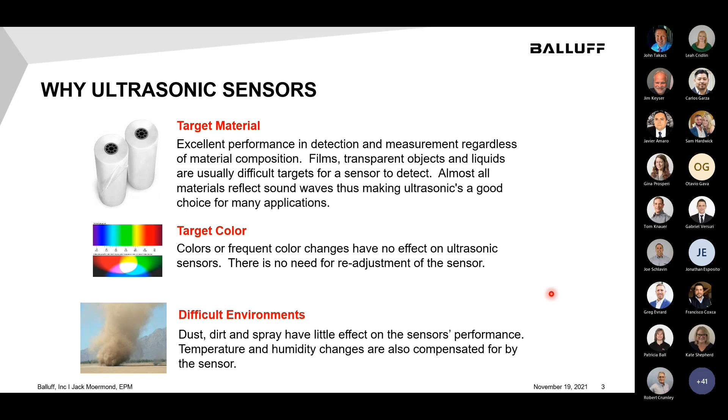I actually pretty well touched this—why not use photoelectric sensors? One of the nice things with ultrasonic is you can set them up in basically proximity mode or like a diffuse sensor, and you can get some long ranges out of these guys. I mean, you can get ranges up to 20 feet that you can't do with a diffuse type photoelectric sensor.

Surface color, reflectivity—I mean, clear glass to an ultrasonic sensor is the same as a shiny metal plate. It doesn't care. So we can get good sensing repeatability out of these guys. Then the analog response is good, and so is the resolution on these ultrasonic sensors. So in some cases, it's actually a great alternative to photoelectrics.

I think I was actually talking to Mr. Takacs one day. He had an application where he was trying to detect a tire and do some measurement, and he was looking at the sidewall, I believe, and I suggested ultrasonics because, again, it's a good surface to bounce the sound off of.

So there's a ton of applications and industries you can use these sensors in: material handling, automotive, packaging, pharmaceutical, tires, paper and printing, and just a number of other applications these sensors can be used on.

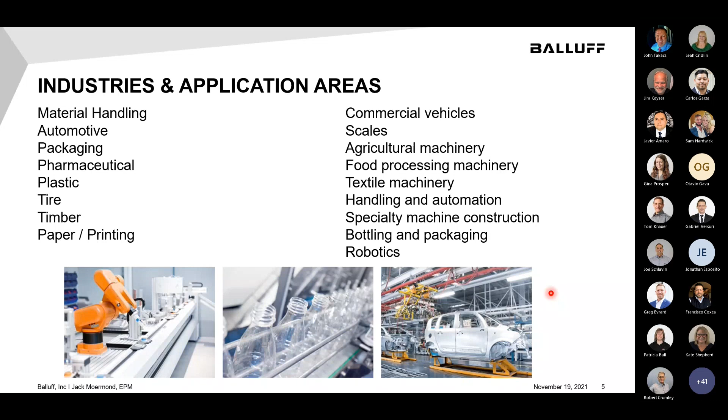Moving along the same line, you can use these for web monitoring. Basically, you can use them for loop control. You can use them to see if a web's been torn. You can do height and width measurements.

Typically, these are going to be like the 30 millimeter and 18 millimeter sensors, so you can set these up as a three-dimensional measurement—look down and also look at the side, from each side. So it's a good alternative to photoelectric there.

You can do presence verification, so whether or not there's actually an object there, if a pallet's full or empty, if containers have product inside of them. You can use multiple sensors and look at a big area if you want to.

Robot positioning with ours, with the versions that are in the R06 type housing and also the M12 housing. You can verify positioning with robots, put these on the end effectors, and they're fairly lightweight.

Another application is wire or thread breakage. So the key thing here is obviously you have a small object, so you're going to want to use a relatively small style sensor, but you also want to make sure that the object always stays within the cone, the sound cone coming out of the sensor.

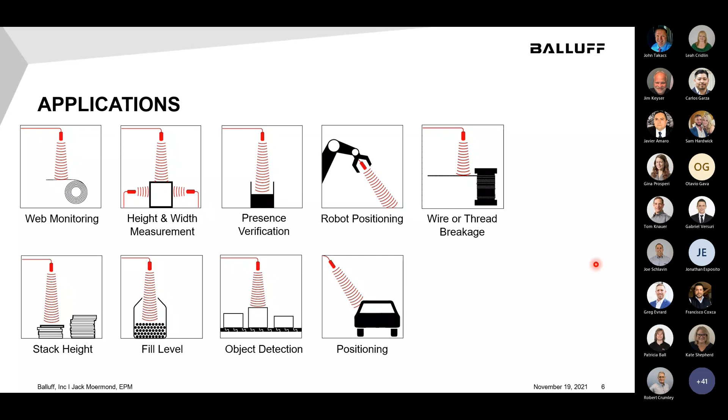Here's some pictures from some different applications. So this is basically clear plastic off of a payoff reel. So they're actually looking down to see what the diameter is. Works a lot better with ultrasonics than it would with photoelectrics because of the clear surface. Concrete block stacking to see if the stack is at the right height. This one is for collision avoidance. It's one option to do it that way.

Again, presence loop control. This would be great on paper. Making roofing shingles or roofing paper and stuff like that. So you can do good loop control. Again, even steel. This is an application from life science to verify that vials are filled at the proper height.

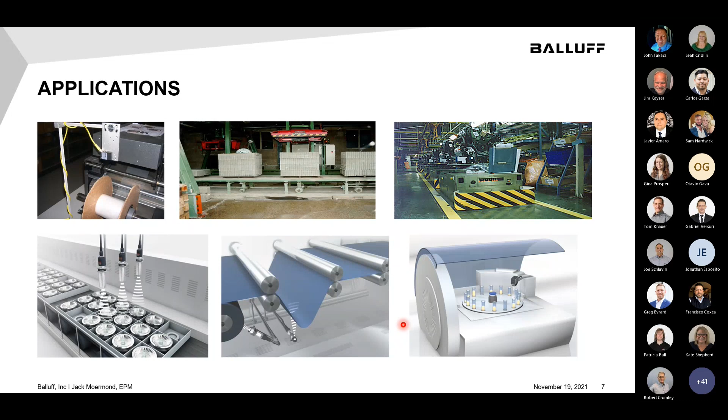And then this application here is to ensure that the packages have been sealed. So if you have a package that's not sealed like these are, it's partially open, it's a great application for that. Again, more loop control, robotics, silo fill.

There you go, John. Got one for tires for you. So we can do tires. I think this is a type of a payoff reel for like rubber or something like that. Both of those are tire, yep. Are they? Cool. Both of those are tire.

I'm trying to take care of you. You're a good man, Jay. I know. I try. Don't let Leah tell you differently. I don't pay attention to her.

Anyway, and then this one here, this is a life science application. So these are what they call microplates. So they put various liquids in there for testing and so forth. We actually have a demo set up this way that we're going to take to some life science shows. So we put this focusing attachment on there. We can look down into these microplates. And typically these cavities are maybe 1 centimeter in diameter or maybe a centimeter deep. So we can detect those levels with the ultrasonic.

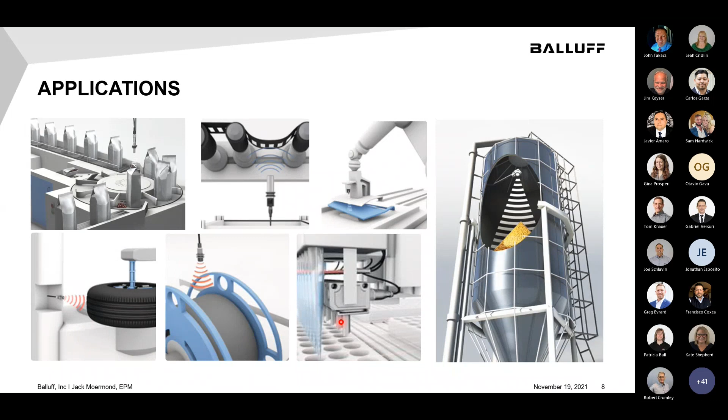So what are some good targets? Water, paint, varnish, wood, plastic, steel, concrete, glass, hard foam. So hard foam being stuff like maybe styrofoam or the pink insulating foam that they sell. Then some poor targets are cotton and wool, or a lot of fabrics, soft carpet, foam and soap.

I actually have seen where the foam in beer is what they call hard foam because of the carbon dioxide. So actually, according to what I read, you can detect beer foam with an ultrasonic. Any powders with high air content, again, soft foam, and flour is actually one of the worst things. They say it absorbs sound very, very well.

Nice chat there, Bon and Will.

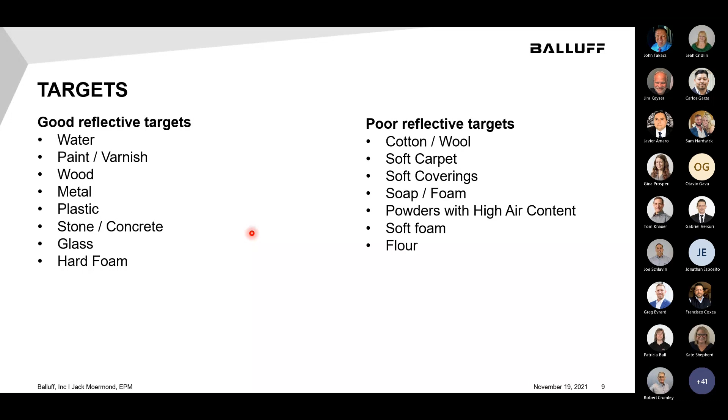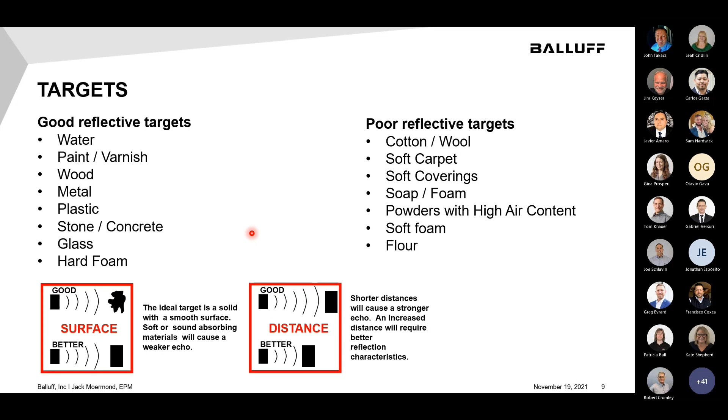Anyways, some more things on the targets. The ideal target should be solid with a smooth surface. If you don't have that and you have a rough target, you can still do it, but it's obviously going to have a weaker echo. The shorter distances could cause a stronger echo, or an increased distance will require better reflections. However, if you're doing something like thread or wire, you're going to need that shorter distance. And then obviously a larger object gives you more surface to reflect the sound back to the receiver. So if you have a smaller target, use a smaller sensor, get closer to it.

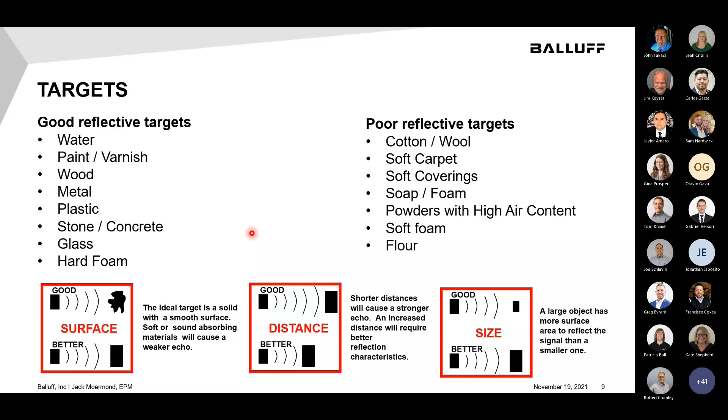So how do these guys work? These are basically time of flight sensors. So there's a transducer inside that sends out a burst of about 200 kilohertz sound waves. So some people can hear them. Personally, I cannot. So it shoots out this sound wave and it's in the shape of a cone, and that's very critical. I'll talk about that in a second.

Anyway, the sound wave goes out, hits the target, it's reflected back. The sensor calculates the time from when it's sent out of the sensor till it receives the signal back. Again, just like time of flight with a photoelectric sensor. Okay.

With an ultrasonic sensor, it's a three-dimensional detection zone. Okay, so that's kind of key. I was talking with some folks yesterday about an application, and we kicked around using an ultrasonic, but again, this sound wave goes out in the shape of a cone, and it's three-dimensional. So if there's a flat surface here, there's a possibility you might start getting sound waves bouncing around or echoes. So you have to keep in mind what that cone shape is and the size of it.

How they determine what the detection range is, they take standard targets and they move them from side to side. So in this case, for the red zone, the typical target is either a 10 millimeter or 27 millimeter rod that they move back and forth across there to determine the red zone. To determine what the blue zone is, or the maximum range, they use a 500 by 500 millimeter plate and they move it back and forth to determine what it is. We cannot detect anything outside of the blue zone, so you're going to want to make sure you keep it within that area.

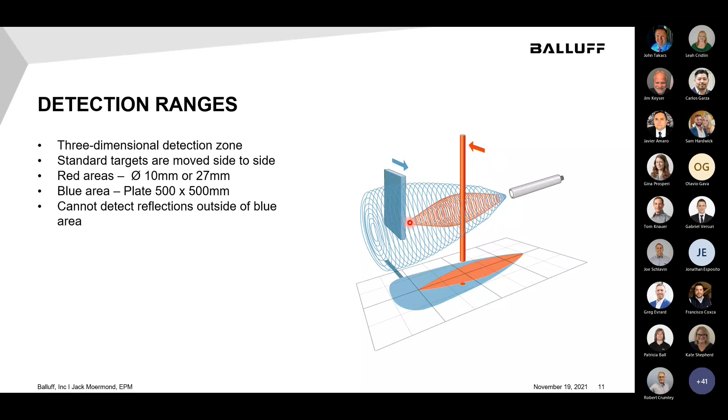Some definitions that are really key. So the first one is a blind zone, or some folks call it a dead zone. If there's any objects that get into that blind zone, you're not going to detect them. Or if you do detect them, it's going to be very unreliable. So make sure you keep that in account. And it's just like some photoelectrics have a blind zone in those as well.

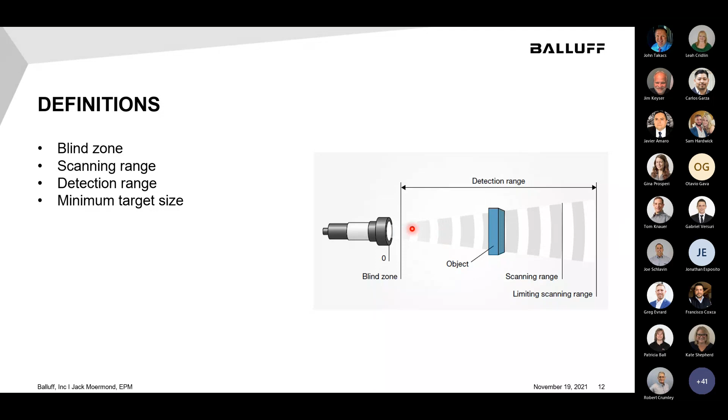Your operating zone, or your scanning area here, that's the assured area of detection. So anything within the minimum and maximum range, you're going to be able to detect those best. Your detection range is where you're going to get a fairly decent measurement or detection. But once you start getting out into this area here, you might start getting some unreliable results. So you want to make sure that you're within basically the assured area. And again, the target size, you have to keep that in mind. So if you have a small target, you want to use typically a smaller sensor, just like you would a photoelectric.

You can get some different operating modes out of these sensors. So the first one is background suppression, and it's just like a photoelectric background suppression. So with this, you have control over the hysteresis. You can ignore the background. So you set up your switching point just like that and totally ignore the background.

The level demo that exists out there that has the RS6 ultrasonic sensor in there, the range on that ultrasonic is much farther than what the tank is. So basically it's kind of working in background suppression mode. So I taught it what the low level was, taught it what the high level was. And so it's basically the BGS mode.

Thurston just brings up a good point. Sensing distance is based on the target size, so the applications must be tested very thoroughly too. Just like capacitive sensors and some other stuff, we really need to make sure these things are tested in the worst condition.

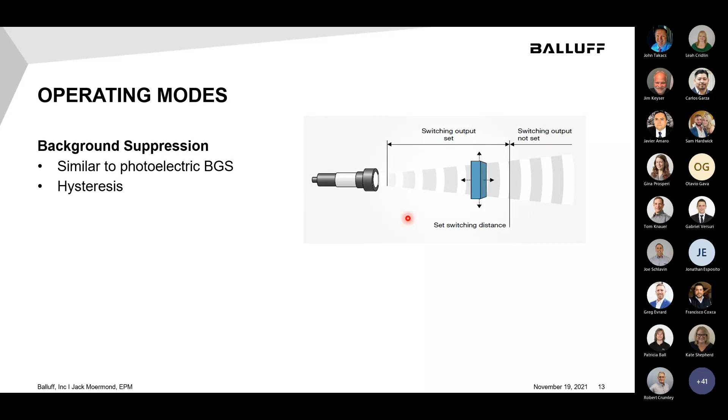Diffuse, like I've said, this is similar to a diffuse photoelectric sensor. So any object that's put out there is going to reflect the sound back. Again, the harder the surface and the better that the surface can reflect sound, the better everything will be. But again, it's just going to be just like a diffuse sensor. Anything that gets within that area, we're going to be able to detect it. And with these ultrasonics that we have, we can get a discrete output, or we can get an analog output, or both.

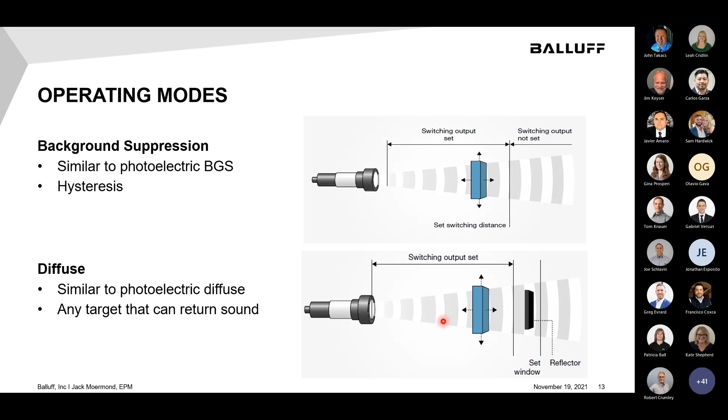There's also a window mode. So as long as the object stays within those two limits or within that window, it'll be able to detect that. You'll notice that a lot of photoelectric sensors now that are coming out, like the R254, you can set things up in a window. So it's something that's pretty common, even in pressure sensors.

Then last but not least, we have analog. So the analogs can be 0 to 10 volts or 4 to 20 milliamp. You can scale these guys so you get a linear output. And you can also select whether it's rising or falling. So as the object moves towards the sensor, you can either have it falling because of the short range, or you can reverse that and have it rising. So as it gets closer, your analog output goes up. And resolutions on these sensors can be anywhere from about 25 microns or 36 microns and better.

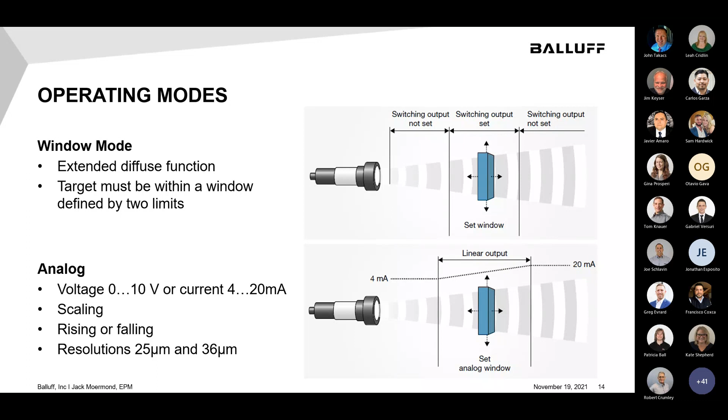So let's talk some application considerations. Again, smooth surfaces are the best. If you have a smooth surface like glass or metal or whatever, the sensor should be perpendicular to it, or 90 degrees, plus or minus 3 degrees to the surface.

If you have a rough object, say, I know one time there was a customer that wanted to do basically a dumpster, and they were throwing stuff in there to see what the height was. If it's a rough object, you can have a greater angle on the mounting because you have so many rough surfaces coming back at you.

Gina just asked a question. What's the most common application for window mode? Great question. Let me think about that one, Gina, and I'll get back to you.

Right now, my mind is blank. Actually, my mind's blank a lot. But anyway, it's blank right now for answering that question.

If you're doing temperature, say for hot metal, the one thing that you really can't do is put these in a lot of turbulence. So above a tank of like molten aluminum or whatever, it's going to be very turbulent. So basically what you're going to want to do is try to shoot this with multiple sensors, maybe go at different angles coming down in there. It may work, it may not. You really got to test it. But the one thing you definitely cannot do is mount it straight above shooting down.

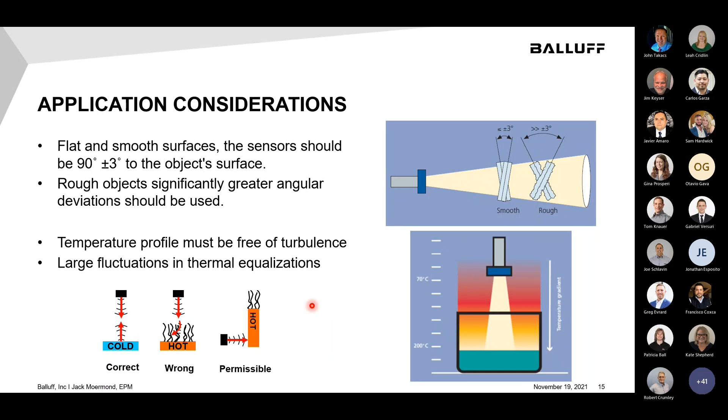Some more considerations. Vacuums. Sound does not propagate in a vacuum. So you can make some measurements in a slightly negative pressure, but as the pressure becomes more negative, your signal is going to be reduced. If you're going into positive pressure, there are some sensors that will operate up to about 85, 87 psi. I think that's like 6 bar. So you can do that.

Normal precipitation, like rain, snow, or fog, usually does not affect these sensors. The maximum range can be reduced, so you want to keep that in mind. Also, you should not let water droplets, snow, ice or anything like that accumulate on the surface. If you do that, you're going to start getting some false measurements.

Dusty environments typically do not affect these sensors. Again, it's something that's going to have to be tested. But paint, anything that's hanging in the air should not really affect it unless it builds up on a transducer surface, in which case you will start having issues.

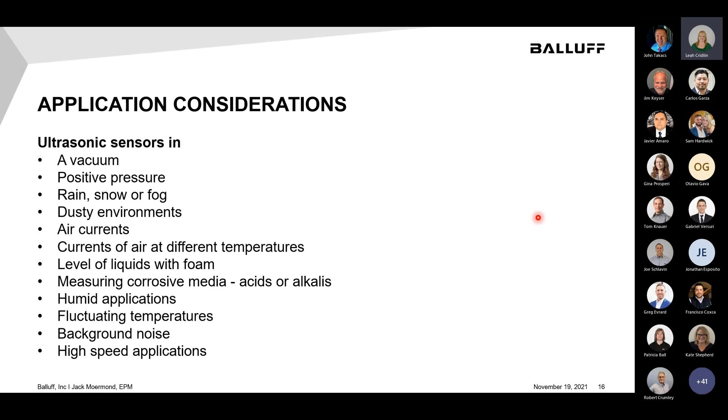These products, our ultrasonic sensors, are actually microsonic or brand-labeled microsonic sensors. As we go through here, once I get into competition, you're going to see that.

Our portfolio includes M30 housings, shown here, with 5 different scanning ranges from 30 millimeters up to 8 meters. These have a display on the front showing you the distance, and push buttons so you can select parameters.

You can get 1 or 2 switching outputs, either PNP or NPN, and analog outputs, either 4 to 20 or 0 to 10. Again, the display gives you the actual measurement coming out.

Most of our ultrasonic sensors can be synchronized. So if you have several sensors, say looking at a big pallet, you can synchronize up to 10 ultrasonic sensors so they don't cause any crosstalk. That's pretty much true on every one we have, and you can teach this guy with 2 push buttons.

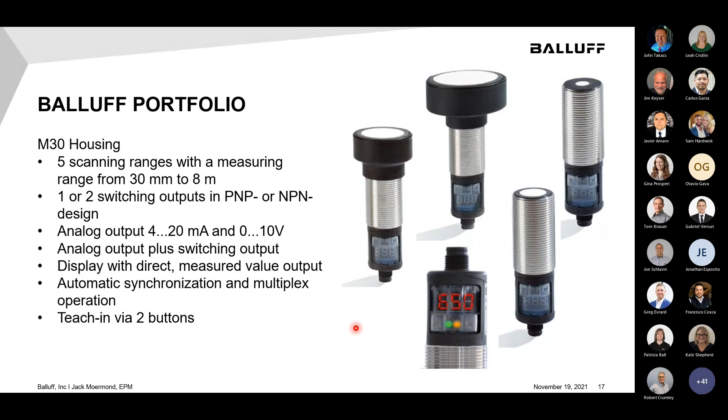There is 1 M12 ultrasonic sensor. It has a measuring range from 25 to 200 millimeters, 1 discrete output, either PNP or NPN, and the same thing with this, you can teach it using pin 2.

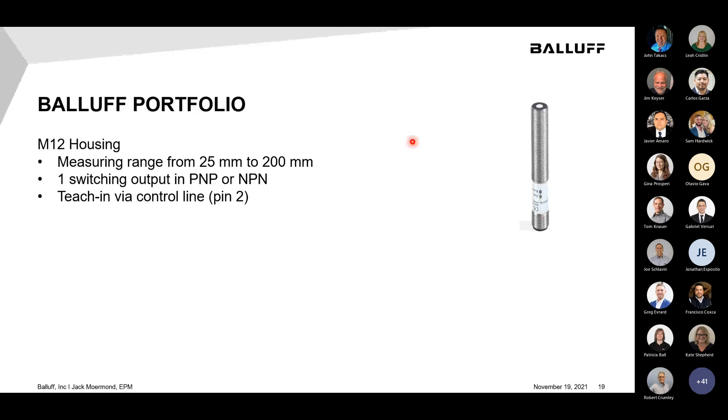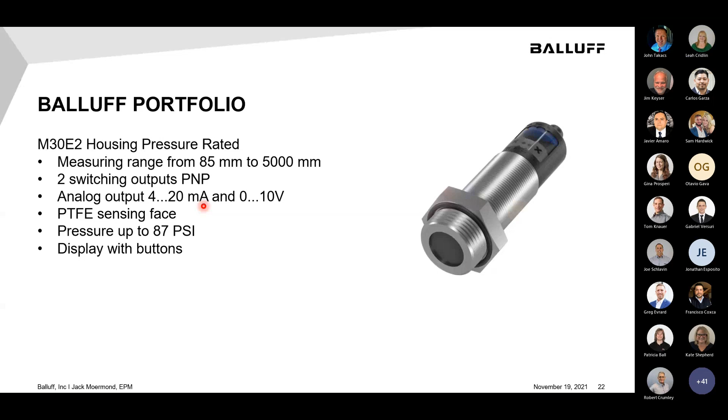Some accessories we sell: you can deflect the sound, so you can put this in and shoot sound at like a 90 degree angle. You can put focusing attachments on here. This is the one for the M18. These are the 2 focusing attachments for the M12, and then this is the one for the RO6.

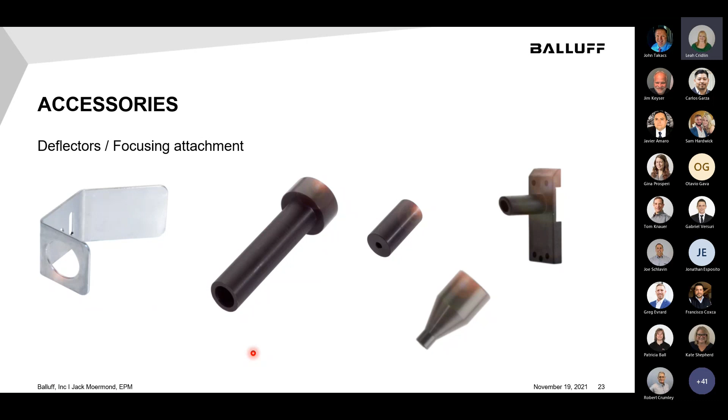So, competition. Obviously microsonic, they're still selling them in the States. I see them listed on the web from a number of different distributors and so forth.

P&F is a big competitor to these products. They offer a pretty good line of ultrasonics. When we first released ultrasonics, we brand labeled them from a company called Pil. The nice thing about the new versions is that the actual cone is much smaller than the Pil version was, so that was actually a good thing.

Turck, they have a pretty good line. These are the Turck versions down here. They obviously have a good line of ultrasonics. Leuze, this is basically all I could find on Leuze, just these 2 versions here.

You notice the similarity between SensoPart and SICK and the ones I've just shown you. So SensoPart and SICK also brand label microsonic ultrasonics.

It's interesting, the other day I had a conversation with a customer who was doing some ultrasonic applications, and he was comparing ours to P&F. He said the P&F was working actually very, very well compared to ours. He also said the microsonic was working really well, maybe even a little bit better than ours, which at the time I thought was kind of interesting since ours is microsonic as well. So anyway, I guess it's the interpretation.

Some additional ones: Siemens. These are the Siemens versions here. Baumer has their versions. Schneider actually bought a company in northern Cincinnati called Hyde Park, and they used to have some really, really good ultrasonics. I used their stuff when I was working at a machine builder. Hyde Park actually had some really cool things. Then IFM's got quite a wide variety of different sensors.

Any questions, comments, other than what's come in?

Will had a question: only diffuse styles, no through beam or through styles? I haven't seen any, I don't know that. Thurston, do you know of anybody that actually makes it? I was just asking if that's a possibility, or if it's just this. I don't know that it is a possibility. Well, yeah, there's people out there that do make what they call through beam, and it's actually like a fork style. They also make double sheet detector types. Oh yeah, also like the label detectors. Yes, yeah, exactly it, Jack. Those are the only ones I know of for sure, because they're extremely short range when they do that.

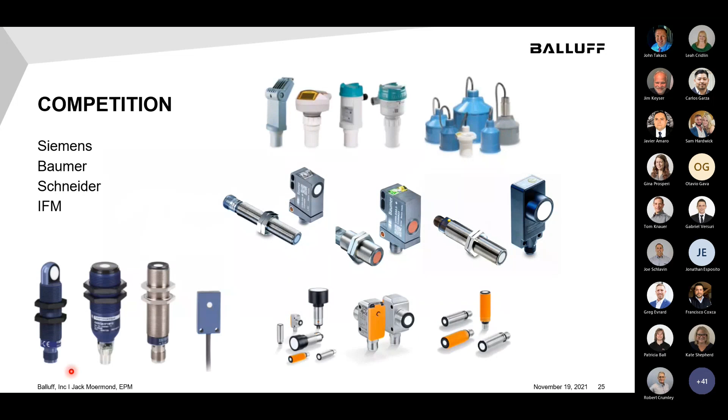Right, yeah, because they're like what, 2-3 millimeter range on that fork. Yep, and then some of them are just a little bit wider, maybe 5 or 10, when they're doing that double sheet detection. I'm not sure exactly what the through beam does to achieve that, but that's what is out there. So actually it's really only point and shoot, which is fine. I was just asking. Okay, I actually did see a couple images from some different manufacturers that had that fork style, so it would be interesting to know how they perform that through beam type function.